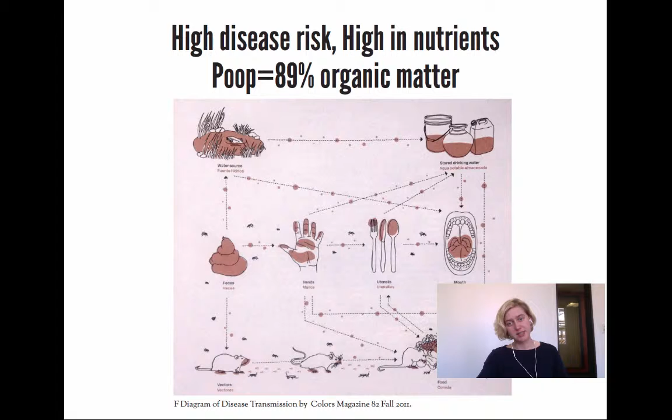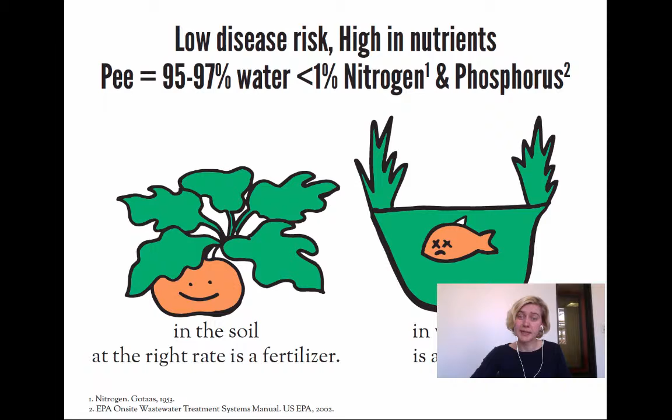So urine, on the other hand, is really low disease risk, but it's high in nutrients. Nutrients in the right place are a fertilizer, and nutrients in the wrong place are a pollutant. So that's why we really care about where we're putting all this poop and pee, and that we're treating it safely for the pathogens. So with pee, it's not a concern about treatment, right? Because it's usually sterile when it comes out of the body, unless someone has a blood contamination issue, maybe a kidney infection. So unless under those circumstances, it's fairly low disease risk.

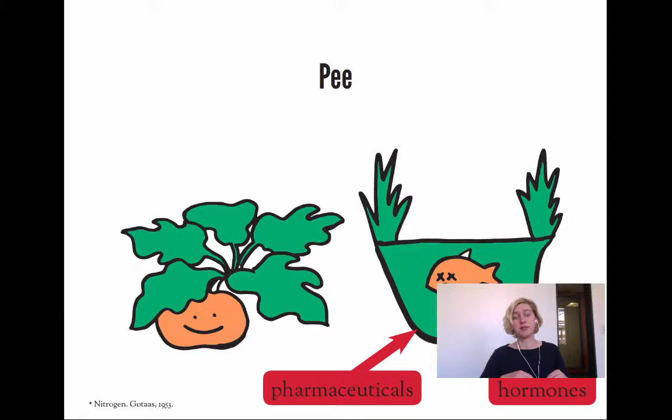But there are some other things in our urine that we should think about, which are pharmaceuticals and hormones. So urine is our body trying to clean out our bloodstream. The kidneys are working to pull out pharmaceuticals and hormones from our bloodstream and then release any salts or whatever byproducts into our pee, and that's how we get them out of our system.

So I'm going to do a super, super rough history of sanitation here that I hope will help ground the context of what you're talking about, because anytime you want to talk about changing the system, I think it's important to think about how we got here. In 1854, there was another cholera outbreak in London, and these had been happening every so often. At the time, people believed that the bad smells in the street were what was getting people sick.

There were open cesspits of poop and pee and animal manure all over the cities, and people thought that if they could just remove that smell, they would stop getting sick. And Dr. Snow worked hard to prove to people that it wasn't the smells. It was pathogens in the poop and pee that were contaminating the water and spreading disease. We now call these germs. So this is the emergence of germ theory.

So these were things that people couldn't see at the time except with a microscope. So it was hard to convince people that it was real because they couldn't see the threat. And we're humans. We tend to only believe things we can see. So it's difficult. So he was able to show people that when one well got polluted because there was a leaky cesspit next door, if that cesspit contained feces contaminated with cholera, when that poop leaked into that water, whoever tapped that well and drank from it got sick.

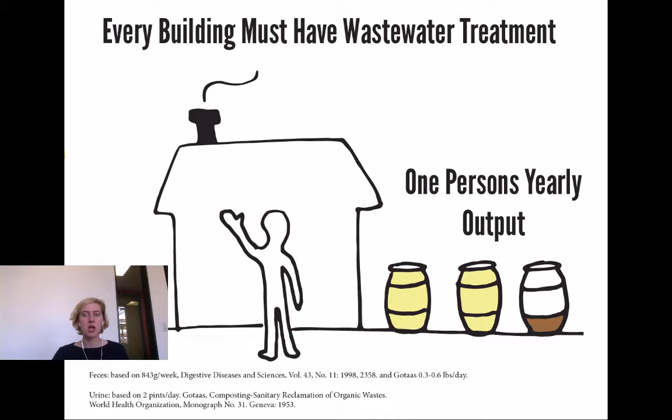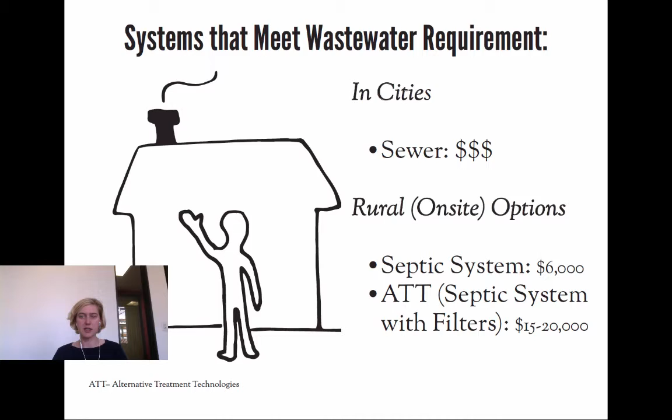So right now, the only options that meet a building's requirement to have wastewater treatment is a sewer or a septic system or a septic-like system, like an alternative treatment technology. And those have some pretty high costs associated with them.

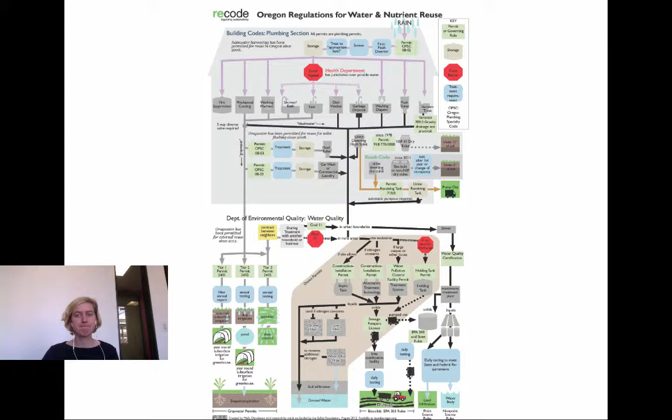Here is a graphic of how we regulate the reuse of water, like rainwater and greywater, composting toilets, and anything related to the toilet here in Oregon. And this infographic can be found at recodeoregon.org.

So everything that is inside the house is regulated within the building department. Anything that leaves the house, like the black water coming out of these pipes, is regulated by either on-site or by the sewer system, and those fall under the federal EPA 503 rules.

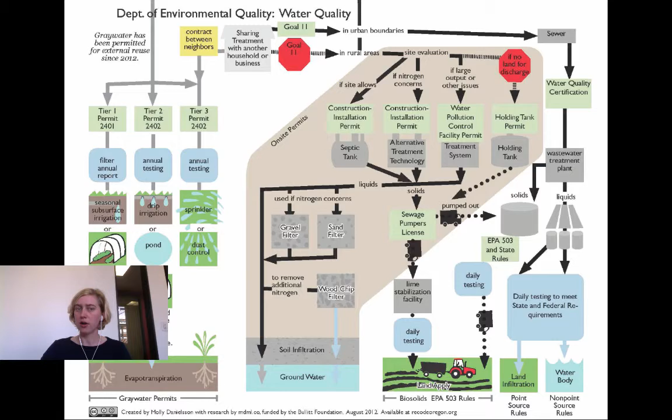And the gray water coming out of the house here on the left is regulated by the Department of Environmental Quality in the case of Oregon. I'm not sure how you guys are looking to do it, but that is our approach. And currently, composting toilets have a tricky situation because even though they are right now within the plumbing department.

So Recode wrote the REACH code, which is in the bottom right corner. I can point to the screen, but I don't think my pointing's very useful in this case. And we require the material, like the humus, to be put under 6 inches of soil. The new IAPMO code requires compost to be put on top of the soil, which is the most active biological zone, and then have 3 inches of carbon material like wood chips put on top of it.

So that's much safer because it will be incorporated into the soil much faster instead of being put deep down where it's pretty cold and there's not likely to be a lot of activity going on. So it's actually much safer to have it be put on top of the soil and then just covered with wood chips. So you can spend more time with this. I shared this more as just a reference if you want to know how we do things in Oregon and how that works.

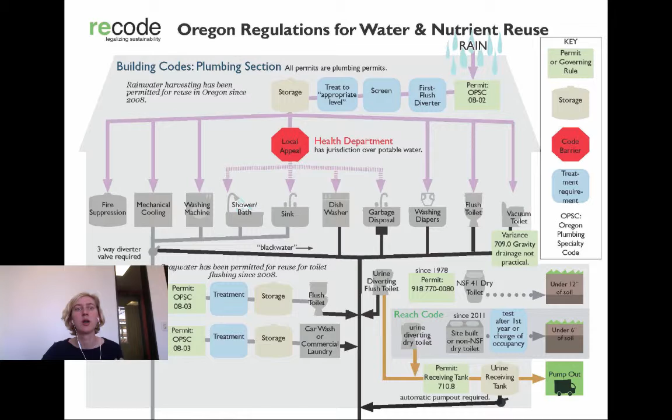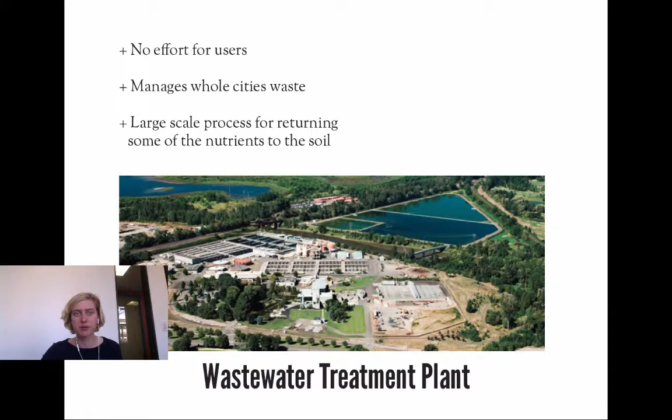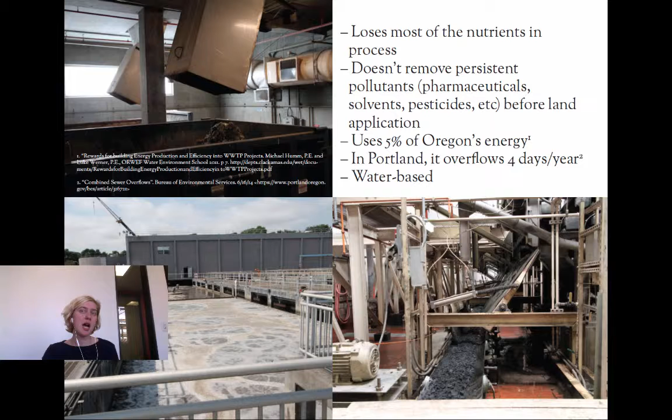So just really briefly, the benefits to a wastewater treatment plant, right? There's no effort for users. It manages the whole city's waste. It's a large-scale process for returning nutrients to the soil. But the downside is it wasn't designed to return nutrients to the soil, right? Back in the 1850s when they started implementing sewers, and then in the 1950s when they started implementing wastewater treatment plants, the idea was really about dealing with pathogens. And it's not designed to remove persistent pollutants like pharmaceuticals before that land application.

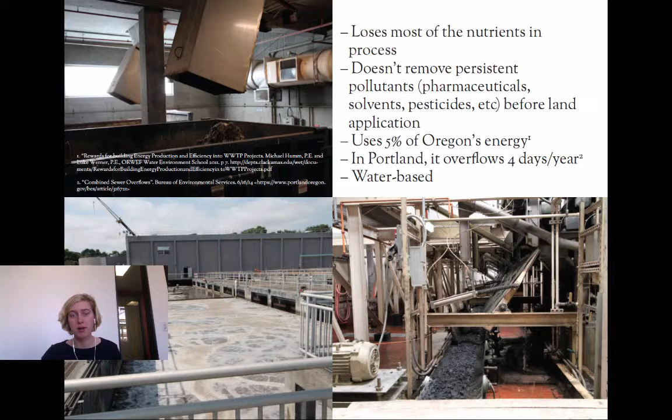So here are pictures of our wastewater treatment plant in Portland, which is above average, doing really great. And this whole process of wastewater treatment uses 5% of Oregon's energy. And in Portland, we have about 4 overflows per year. Another downside is this is all water-based, so it really requires the use of water no matter what.

So if you imagine the wastewater treatment plant primary treatment was more like a French press, a septic system is more like cowboy coffee. You pour the water in with the grounds and you're literally just waiting for the solids to settle. And then the fats rise to the top. And then once things have settled, the liquid will move into the second chamber, or in Europe it's common to have 3 chambers to allow for more settling. So you still get a little bit of grounds in every sip, but the amount of time is what increases the solids settling because it just has more time to settle out.

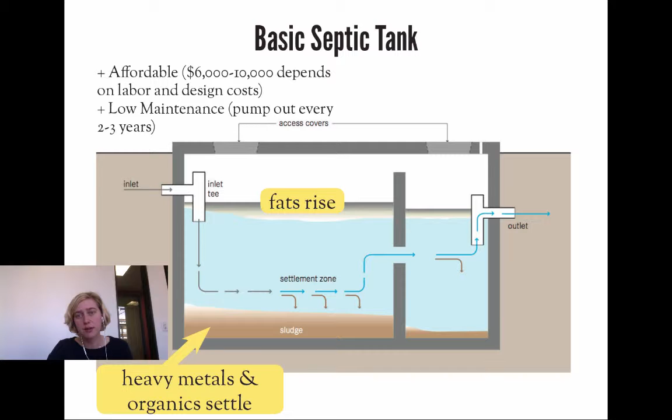So the benefits are this is low maintenance. So these solids at the bottom, they can be pumped out every 2 to 3 years. It depends on the system and the size. And it's fairly affordable. It really depends on who you have install it. So the downside about septic systems is this wasn't designed to remove nitrogen. And when you hear nitrogen in this presentation, think pee, because that's really what we're talking about here when it comes to a household. There's not a lot of fertilizer being poured in. The fertilizer is our pee.

So this nitrogen, or pee, is going right through the septic system and infiltrating through the soil. And a lot of the deep soil where this is going through isn't designed to absorb the nitrogen. It may absorb a lot of the phosphorus, cling to the rocks, but not so much the nitrogen.

And these effluent plumes go down and they tend to stay towards the surface. Groundwater is slow. There's not a lot of bubbling or mixing. So when something enters the groundwater, it kind of stays on top and just flows in that direction. Effluent plumes can be detected up to 2/3 of a mile away. How do we detect this, you're probably wondering? Caffeine. You can always tell where people are, usually by testing for caffeine.

So since the effluent plume usually stays on the top, that's why we tend to put wells deep down, so that as the well is sucking in water, it's not accidentally sucking in the effluent plume, because we don't want people to accidentally be ingesting other people's pee because of the things we talked about earlier, like pharmaceuticals and hormones that can be in our pee.

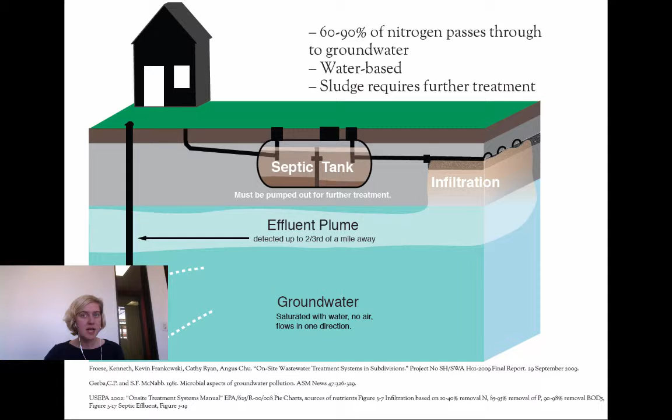So the other downside is, the sludge requires further treatment. The sludge is separated, but it's not treated. It still needs to be treated to remove pathogens before being applied to the land. And of course, this is also a water-based system.

So what we used to think about groundwater and what we think about it now has changed as we know more about groundwater hydrology. So we used to think that septic tank plumes were kind of like paint in a paint bucket, and it would just spread out evenly. So the figure on the top shows what we thought about why setbacks were useful, because if you had these certain setbacks, no one would be polluting each other if they met the setbacks, because the material will disperse laterally.

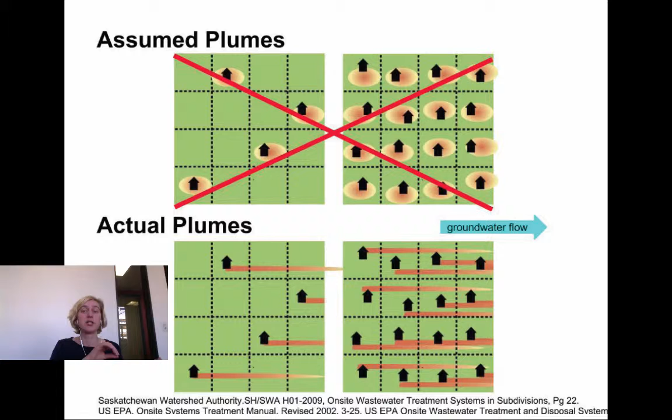And it turns out that's not how it works. So the bottom illustration is a more accurate description of how septic tank plumes work. They actually go in a direction and they cross property boundaries.

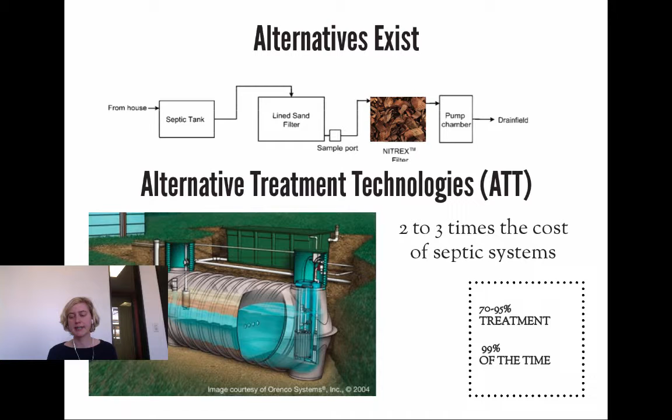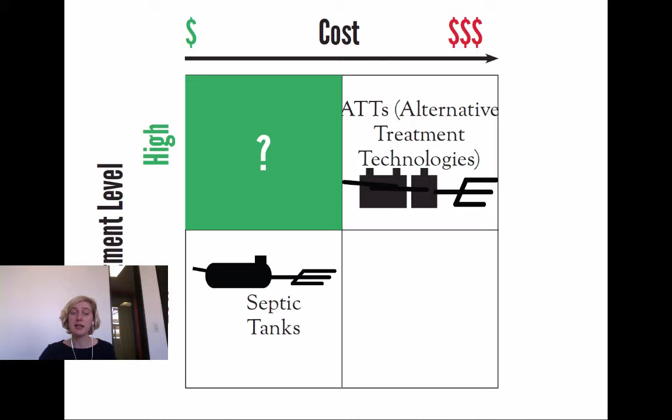And then on the bottom, we have the Orenco AdvanTex, which is a great system. But these systems require some electricity and a little bit more maintenance. And electricity can fail. But overall, they're good systems and they are available. But what Recode is really interested in is the systems that achieve a really high level of treatment but don't cost very much. So in between this kind of septic system ATT divide.

In 2008, Recode worked on greywater, as I mentioned. And in 2012, we brought in composting toilet rules in Oregon by working on the REACH code. And in 2014, we wrote a voluntary national composting toilet code with IAPMO. So we worked with IAPMO to create a code.

And IAPMO is a model code writing organization. So this is what they do. They write the Uniform Plumbing Code. And our composting toilet is in the green supplement to the Uniform Plumbing Code, and that comes out this year.

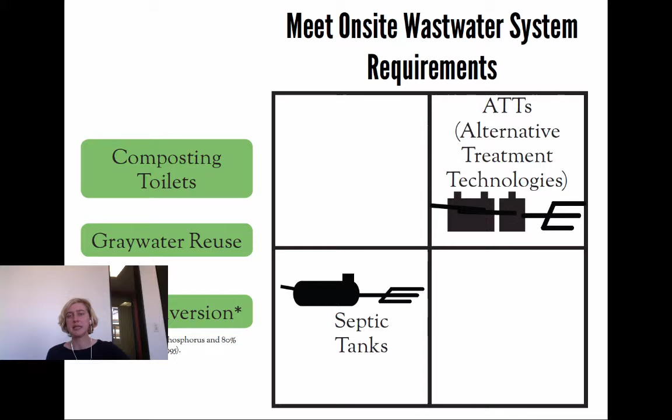So right now the situation is septic systems and alternative treatment technologies meet a household's requirement for wastewater treatment if they don't have sewer as an option. But composting toilets and greywater reuse and urine diversion aren't considered wastewater treatment, so it doesn't help, say, a household looking to repair a failing septic system. None of these three systems on the left can help them meet their requirement to get back up to legal.

So why is this? A big thing I think is the codes. We have prescriptive codes here in Oregon for how our on-site system works, or nothing's ever purely prescriptive, but it's mostly prescriptive. So this is my metaphor I like to use for describing what prescriptive codes are.

Imagine if you had a set of codes that was written, say, 70 years ago about how chairs would be legally made. So it might say, like, it has to be wooden, it has to have 4 legs measuring yay high. Whereas this wouldn't really allow for your favorite office chair today.

So what Recode is working on is performance-based codes. So instead of saying what a chair has to look like, it would say a chair is anything that comfortably seats a human being. And then it would probably have a test for what defines comfort. And that would be how you would get a lot of innovation.

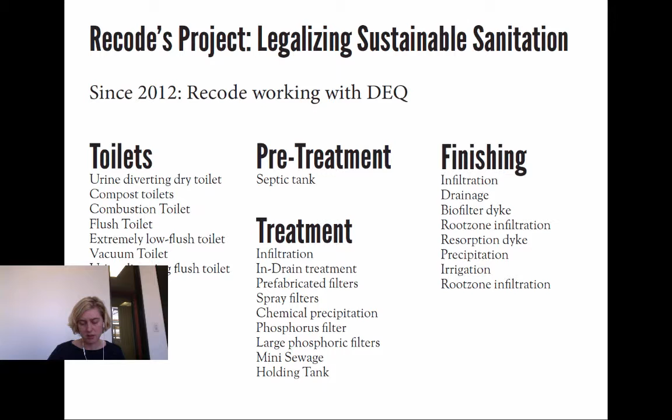So we're working on having basically a range of systems be able to meet a household's need to have a wastewater treatment system. And we've been working on this since 2012 with the DEQ. So I'm going to go through some of the requirements for a performance-based code.

So first you need to set a goal. How clean do we want things to be before they enter the environment? So for a performance-based code, this would say, what's your nitrogen reduction? What's your phosphorus reduction? How much are you reducing pathogens by? Is it durable, watertight, things like that? Whereas prescriptive code would just say, what are the dimensions? What are the materials? Check, check, check.

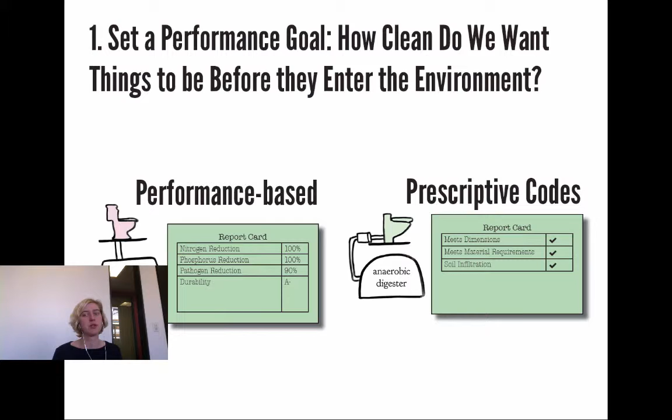You need to decide what the nutrient output is per year. So this does vary from country to country, but deciding this will help. So if you have a set amount that you expect an average adult to make every year in terms of poo and pee, then you can say if a household is on average 5 people, you can estimate how much pollution you expect to be created by one household and how to size a system appropriately.

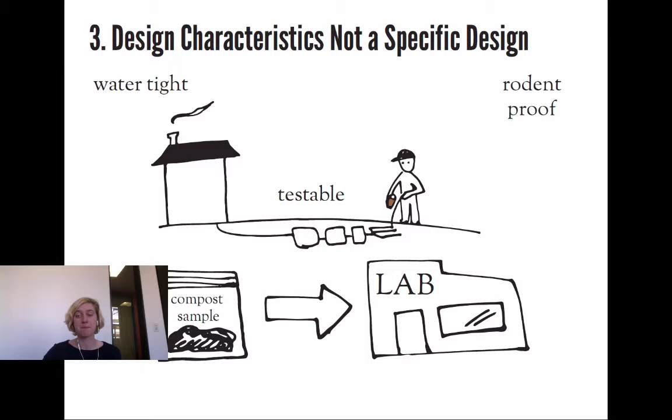And third, you set design characteristics, not a specific design. So rodent proof, testable, watertight. These are the kind of characteristics you can require instead of saying exactly what it looks like. We're really interested in humble code that is future resilient.

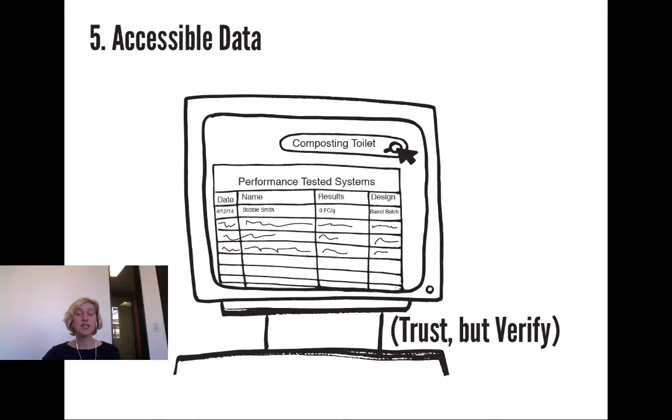Fourth, you need a verification method. So how do you know it passed? Fifth, all this data needs to be publicly accessible. Trust, but verify.

Great question, Mr. Fish. I think that these kind of codes will allow us to work as we learn more. So we're going to learn more about what else is dangerous. Right now, we know that nitrogen is a problem, but in the future, we might feel that pharmaceuticals are worth testing for. And these kind of codes can grow as we learn more.

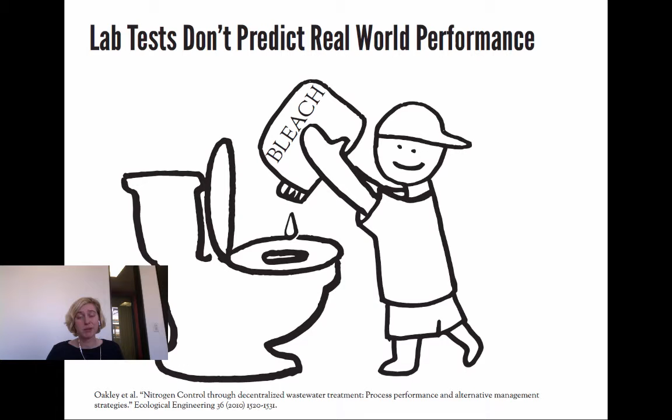I think it's really important that we don't specify how systems look, because this could prevent us from having innovations in the future that we might really, really like. So that's what Recode has been doing, and this is the kind of future we're trying to create.

And let me tell you more about what is specific to Vermont. So I think there are many options for states like Vermont. In order to allow greywater reuse, you can adopt the best practices of the rules from the 4 states that have already legalized greywater. To allow for a range of composting toilet systems that work to protect human health, you can adopt the Uniform Plumbing Code's Green Supplement composting toilet section that Recode worked on. And that code is all ready to go.

IAPMO has created a code that already works within the plumbing system, and it's been vetted by their whole team of experts. If Vermont is interested in joining Oregon and creating performance-based codes to allow for a range of innovative sanitation solutions to be used instead of septic systems, like I mentioned earlier, you can partner with Recode and the Oregon Department of Environmental Quality as we work to create a model performance-based on-site code. So that's one option.